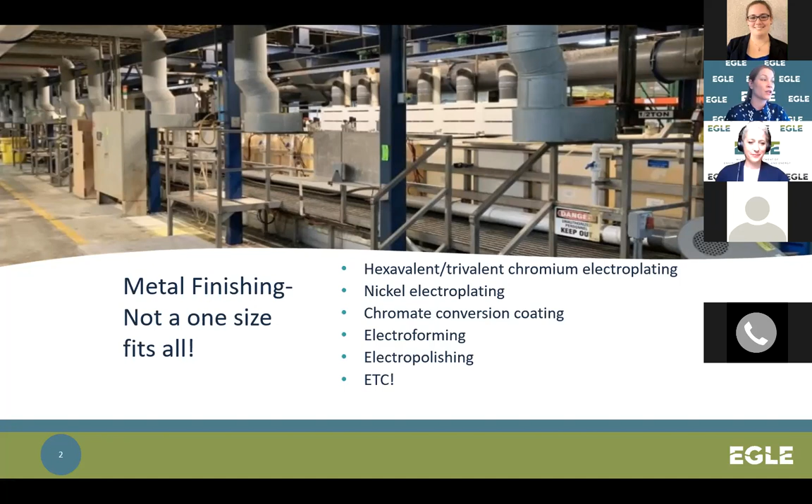So those companies that are using hexavalent chromium, trivalent chromium, are going to be subject to the chromium NESHAP. That also applies to anodizing that's conducted with electrical current. And there's other things like chromic acid etching, which is part of the plastic parts plating process that does not use an electrical current. So it is not subject to the NESHAP currently.

So hard and decorative chrome plating, that has to do with the thickness of the chromium applied. I've always thought, okay, well, hard or decorative chrome plating, like one is a harder finish, but it really has to do with the amount of time that it stays in the plating tank and therefore the thickness of the chromium that's applied to the product.

Here in Michigan, we've taken a different approach on our air toxics regulations, and up until the 2012 NESHAP updates, we were able to not only apply our Michigan air toxics rules to a chromium plating activity or a permitting action, but also those items that are within the chromium NESHAP that would automatically apply to a subject facility. And so oftentimes in Michigan, we would double dip, so to speak, and where a company might choose the fume suppressant or the wetting agent type of compliance approach for the NESHAP, Michigan would also require a scrubber control device on top of and in addition to that NESHAP required practice.

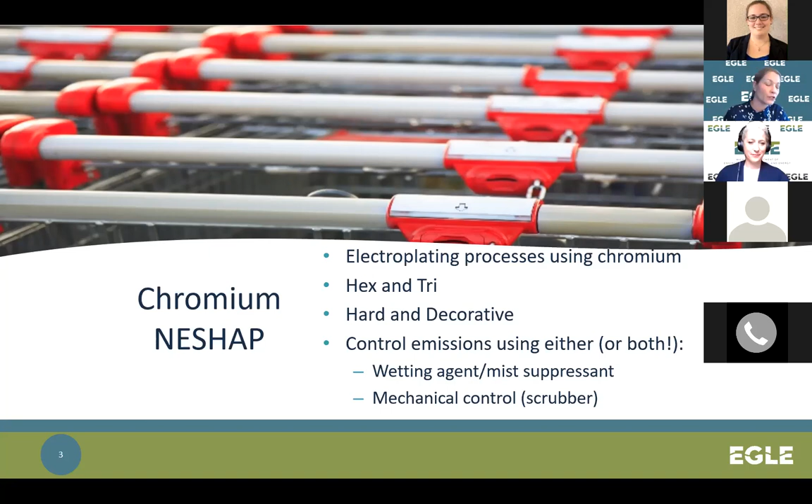So there's also the area source NESHAP for plating and polishing operations. And I will be the first to admit that because Michigan has not accepted delegation for this regulation, I know very little about it other than it exists. So if you have any questions about that, I'm not your expert, but we do try to provide outreach to smaller facilities and let them know that this is out there. In Michigan's case, since we don't have delegated authority, this specific regulation would require an EPA inspection in order for compliance assessment to occur.

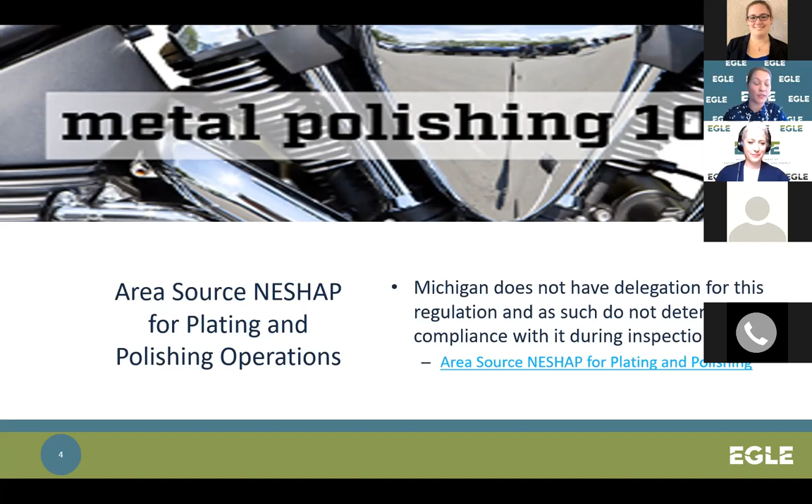And last year, we did update our metal finishing industry guidance. Our website used to just be specific to chromium electroplating, but we really recognized that we were missing out on quite a large portion of the metal finishing industry by just really streamlining to the chromium regulations. And so we added some components to our guidance, and Jennifer and I worked real close together on this one and developing some guidance materials for small businesses that have a plating or polishing industry.

Things that are vented internally versus externally. Some plating operations are vented internally. And really, we've come across a few companies that have decided to change ventilation from maybe once when it was internally vented to, you know, now they're really getting into an employee health approach where they've realized that we really need to vent some of these plating emissions externally. And so how does that impact their permitting status in Michigan? And this is one of the ways where they can look that up.

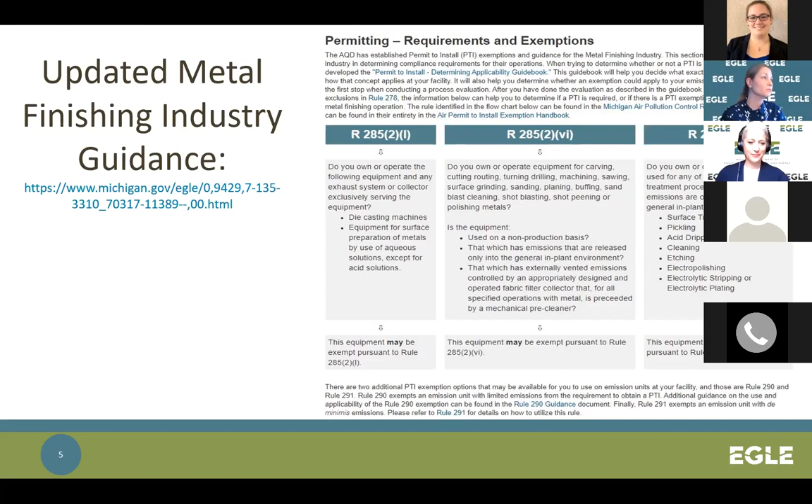So now we get to the fun part, and I'll let you know throughout the slides which photo I didn't take, and I think there's a couple, but we'll go through that. But for the most part, these pictures that you'll see are photos that I took myself on inspections at different types of platers. And when I do inspections at these companies, I often see a significant amount of turnover. So almost every time when I'm going, I'm really doing kind of an updated training exercise for the person that's in charge of the maintenance operations and the control equipment and ventilation system.

And so I really do a focus on what should they be doing in their day-to-day, month-to-month, or quarterly O&M inspections, and what things should they be identifying that they can identify, correct, and fix before an inspector gets there and really implement that as part of their preventative maintenance program.

I always say, look and listen, okay? These are some of the biggest cues to detecting problems, especially with some of those aged control devices, because it becomes pretty obvious to an experienced ear that if something isn't right, it probably won't sound quite right either. Air leaks are going to make a noise, and if it sounds different, there's a reason for it. Liquid leaks are also a problem. So can you see any leaks or liquids that are accumulating around seals or drain pipes?

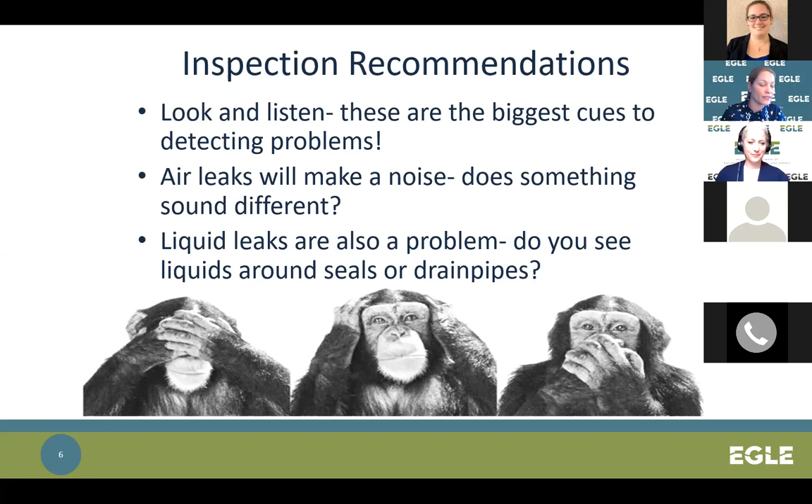And the problem when you have air leaks in a control device is that it creates air infiltration up top, usually on the roof. And so that's going to directly affect performance below, and you're not going to get as good of a capture and therefore protection of your employees. But it can also impact the performance of the control device itself. So let's get into some good stuff here.

So we'll start with this hexavalent chrome plating scrubber. We started investigating this company while we'd been there in the past. It had been a few years since we'd been there. And we got a tip from a surveyor that identified an unusual discharge into a nearby creek. And it was identified as chrome plating waste liquids that were being discharged.

And in the case of this source and also others, it was an aged facility that was using concrete conveyances in the floor to transport their waste plating materials into their on-site waste pre-treatment system. And there was a breach in the concrete because of the corrosive nature and time that led to what turned out to be identified as a very significant and ongoing leak into not only the groundwater, but also surface water of the state.

So that doesn't really have anything to do with air quality, but we talk between divisions, between air and water and waste. And through those discussions, I realized it had been some time since we'd been there, and it was time for an air inspection.

As you can see, I want to say it was probably January or February up here in Michigan at the time of the inspection. And this is one of your more obvious cases of, oh my goodness, there's a significant problem here. You can see that there's large icicles that have collected because the scrubber water was leaking out of the scrubber. This also has got a brown hue and discoloration to it because it was dirty and contaminated with chromic acid from the plating solution.

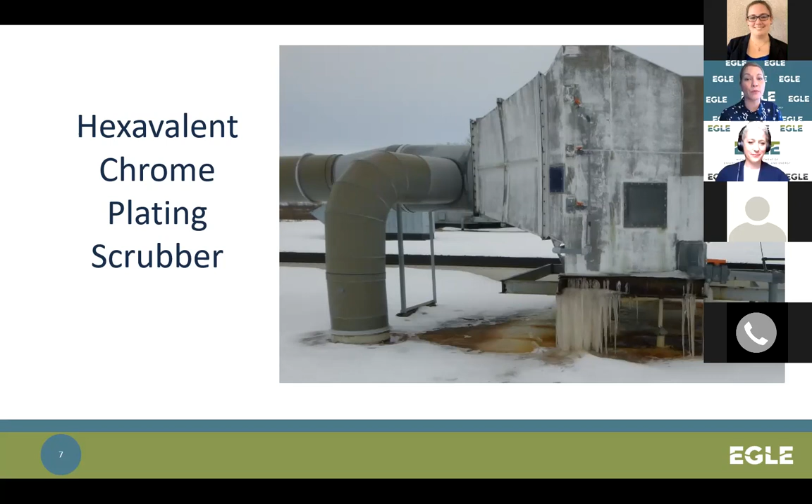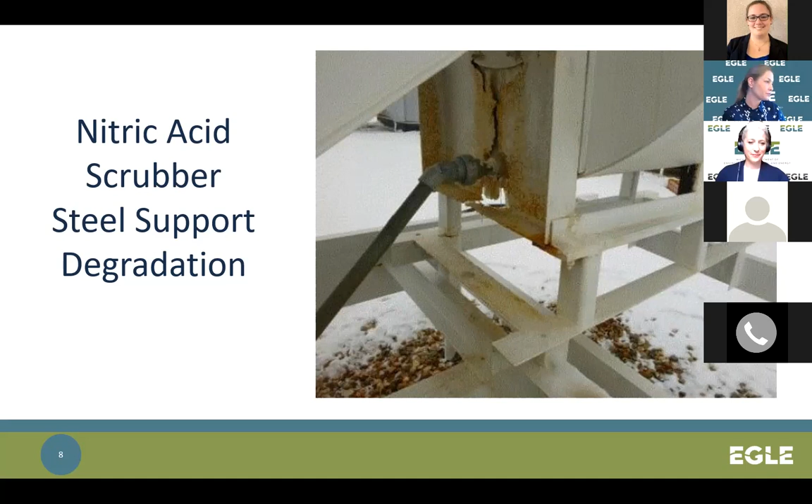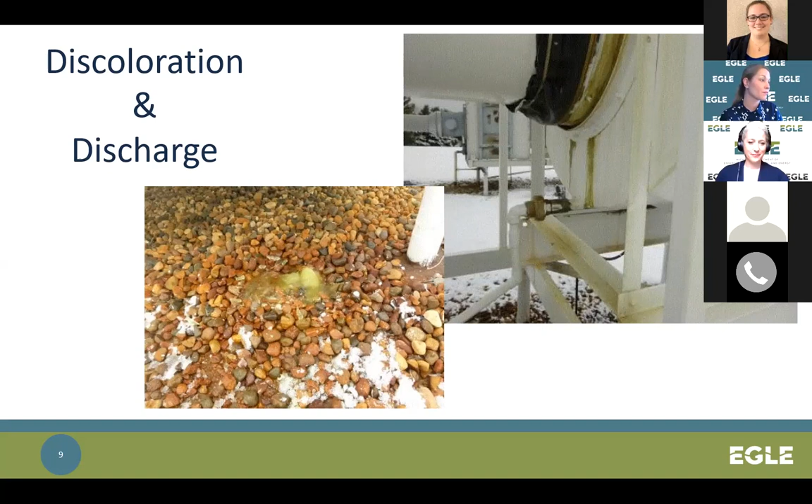Here's some visual cues. It's another one that's obvious, but you could see that over time, we don't expect there to be zero emissions from a scrubber, right? I mean, we still have an allowance of emissions that can occur from even a control device. And so I would think that if there had been an accumulation of, say, 20 years over time, it wouldn't be entirely unusual if maybe there was an upset at some point to see what we see on this scrubber, which is a chrome scrubber, copper scrubber again. And on the right-hand side, you can see all of that green staining on the stack.

Well, it just so happened that they had painted that entire unit 3 months prior to me arriving. And I'd been there about 3 months earlier, and I still had some questions about really what was going on with this unit. And so you could see I went back and saw that there had been a significant amount of green staining down the stack, indicating an ongoing droplet reentrainment type situation with this packed bed scrubber.

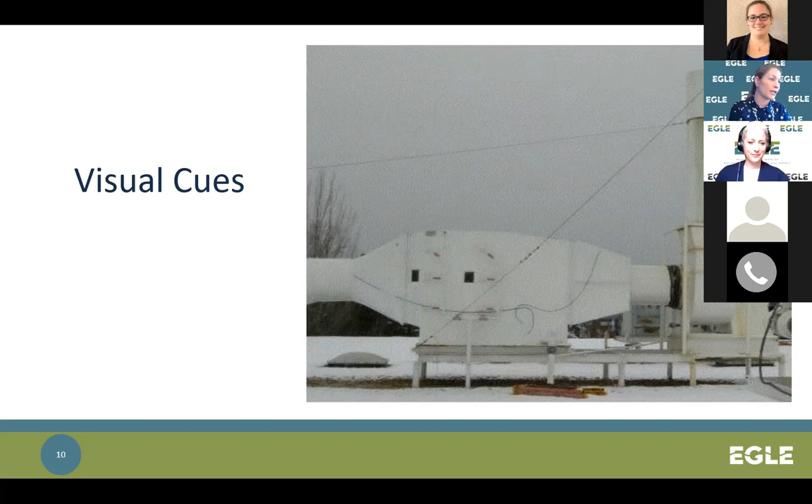So here's a not so obvious visual cue of a control device that's either had an upset at some point or some sort of emissions event that's remained unexplained in this particular facility. I happened to be walking around on the roof for a stack test for another piece of equipment, which was a chrome scrubber. And I realized around this copper scrubber, the rocks just looked a little bit different. And I was trying to figure it out when I was walking.

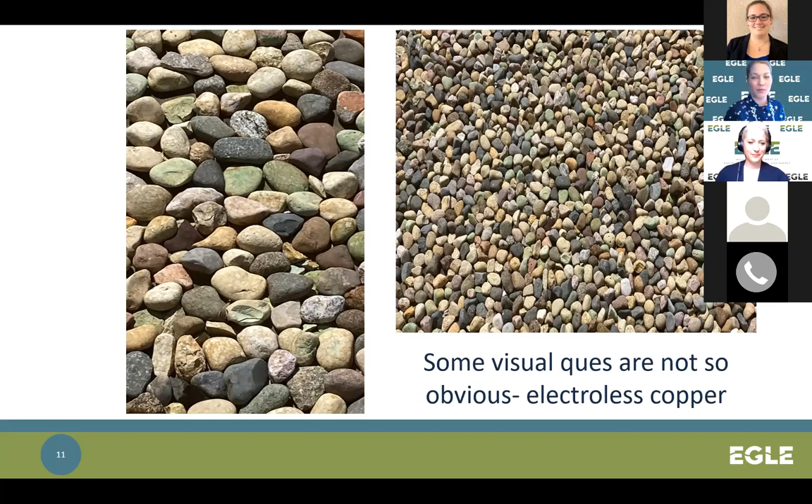So when you're walking around, I find myself, I'm always looking up, and of course I'm trying to be careful, but take a moment to look down as well, because as with this, you're really not ever sure what you might come across. And I really was just working from a hunch on that one, but it turned out to be something worthwhile and something that I'm going to monitor going forward to make sure that we don't have an additional accumulation of green rocks on the roof here. What I'd hoped I'd see when I go back there next time is either a removal or a replacement of some of that stuff, but that'd be probably expecting just a little bit too much.

Here's another example of something that went overlooked by a very experienced company that has a very, very rigorous O&M plan, but they also have a high turnover to where they really just hadn't been training their employees properly. And those that were doing the inspections of the unit didn't know what to look for. And this is one of those cases where I provide my experience to the company and I guess do maybe a little mini training for some of their staff in the moment of, these are the things that I'm going to look for. And these are the things that you should be looking for when you're doing your inspections.

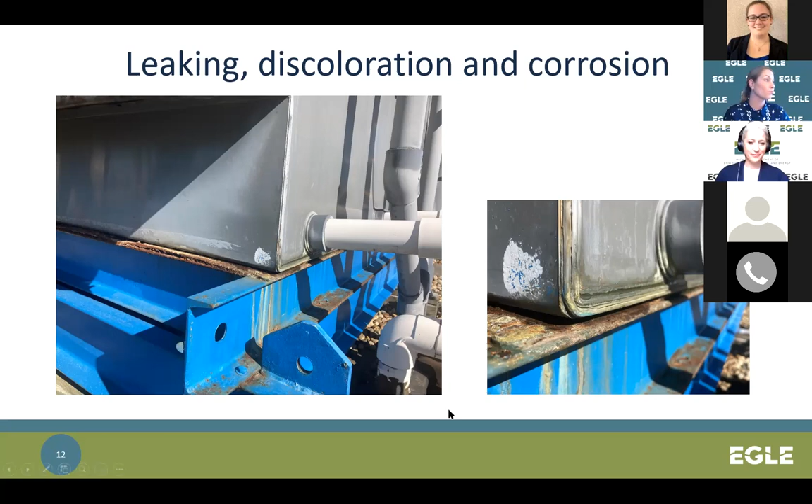It doesn't take a long time for some of that stuff to happen, especially when you're letting the concentrations and the metals and the nitric build up in your waste stream. Not even a scrubber can scrub out all of those contaminants. So they really were dealing with a couple of different issues with this unit, and hopefully, I haven't heard anything from my complainant, and the company has implemented a more frequent procedure so that they're paying a little bit more to get their waste removed from the facility before any of the concentrations get to the level where this type of chemical reaction can occur. So please don't underestimate the dangers of the plating activities.

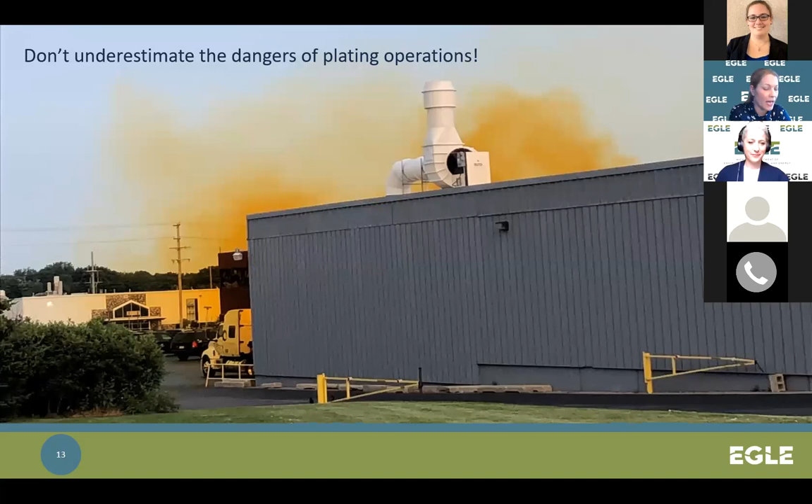And I see a question from Jeremy here. So what percentage roughly were these facilities examples, small businesses versus larger, maybe Title V sources? And let's see, so the one we're looking at right now is, trying to think, a Title V source. This is a combination two plant facility where they do plating at both. Let's see, so this photograph here, this is an area source. So there's a few different plating operations here, but this is not a major source. And the first pictures that I showed you of the icicles and the significant acid degradation, that was also an area source facility. So we've got a combination of both here, but that's a good question.

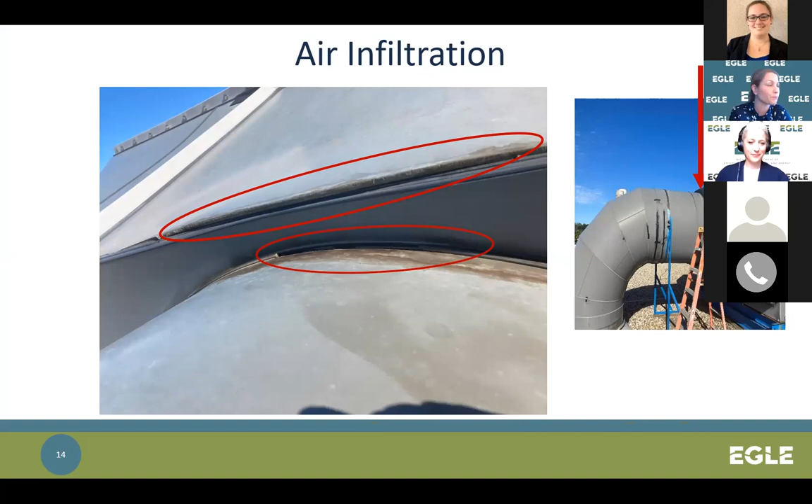So this is an example of the duct tape that was required to implement some temporary repairs on the unit that we were just observing. They tried a more permanent solution, which I've seen pretty frequently on these ductwork repairs, where they take like a plastic and a hot melt pen and try to seal up these seams with their hot melt. Unfortunately, in this case, it required a full shutdown of the line to properly repair it, but they wanted to get their testing done. So they implemented the temporary repairs of some duct tape type material to get that airtight.

And the concern with this was because the leaks and the air infiltration were occurring on the inlet side of the scrubber. And so when you've got basically dilution air and some changes to the airflow of the unit, you're really not getting very accurate testing results. And that was why the first run was invalidated and the company was required to start over at that point. That's probably the second time for that particular facility. I want to say they have 6 different chrome plating facilities, all owned by the same company in our area that I regulate. And I've had to do that previously. And you'll see an example of why there was an issue at one of their other facilities in a picture coming up.

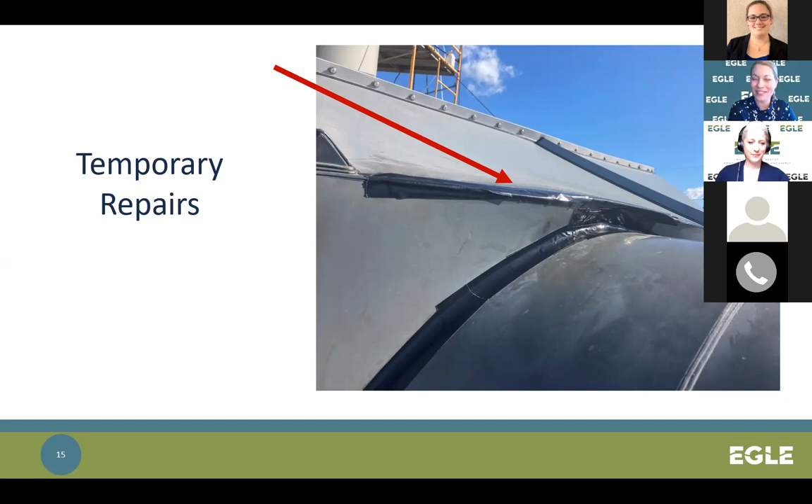This was the scrubber also located there that was going to be tested the following day. And this was a chromic acid anodizing wet scrubber. And this is the scrubber housing on the inlet side of the unit as well. And you can see if you look toward the top of the picture that there's some sealant materials there, but as you travel down in the photo towards where the arrow is pointing, you can see that that sealant material is no longer present and that there's been separation of the body of the scrubber there as well.

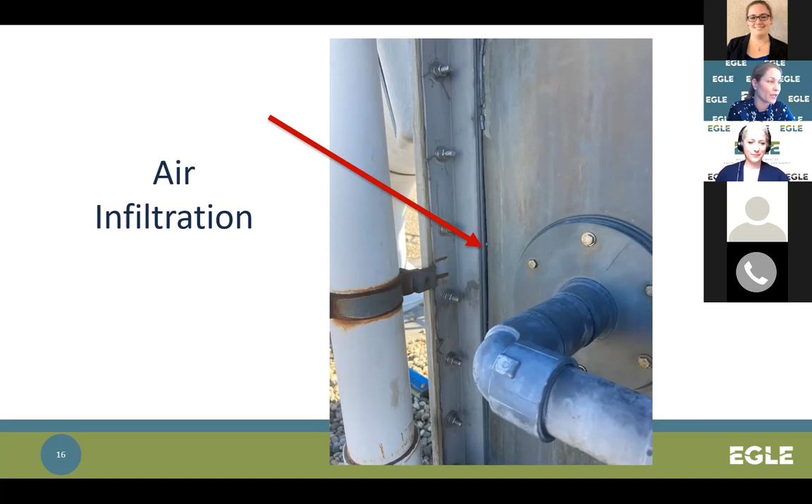And so that was another air infiltration scenario that I found basically because I could hear that air whistling as it traveled across that spot and it didn't belong there. So they were able to more easily correct that deficiency. But again, I'm going to point out that this was a scheduled stack test and they knew I was going to be here and they still missed all of this stuff. So that's why we required some additional O&M activities here.

So when we're out at inspections, we're also really looking at things from a multimedia approach. And a lot of us do that. I've worked really closely with several of our waste management folks, also with our water folks, and being that I'm currently a certified industrial stormwater operator, those types of things in water exposures are always on the forefront of my mind in addition to my air quality official duties.

So if we hadn't been there for stack testing, they probably wouldn't have known this was occurring. And it's another example of they did an inspection a few days before, so this must have really just happened overnight. And those kind of stories do start to get old, but you really still have to work with the companies to make sure that they know what they need to be looking for. And in this case, in the meantime, that scrubber ductwork has been fully replaced simply because it was no longer repairable due to that corrosive nature of the materials that we're working with here.

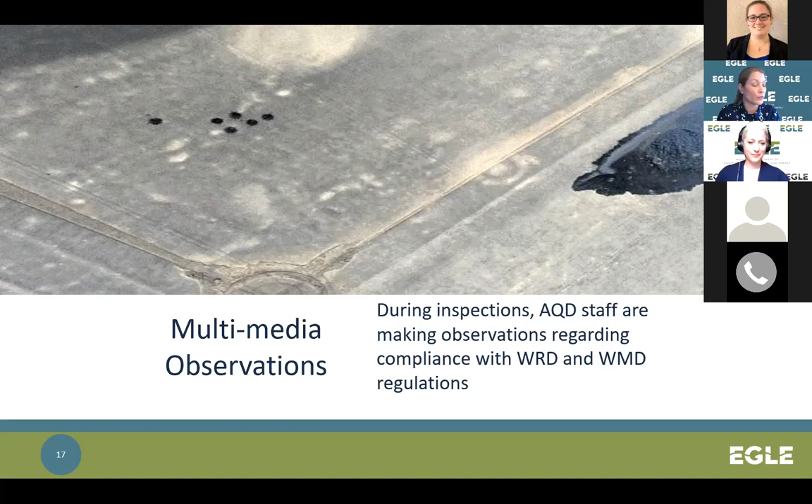And it's my understanding that this company is no longer operational, and the person that was renting the facility and operating this small plating line basically skipped out and left all of the waste there for the building owner to take care of. And of course, as the rules go, it is the responsibility of the property owner to take care of these wastes. So they're working collaboratively and creatively trying to come up with a solution and a disposal so that we can get rid of a lot of this stuff from this facility here.

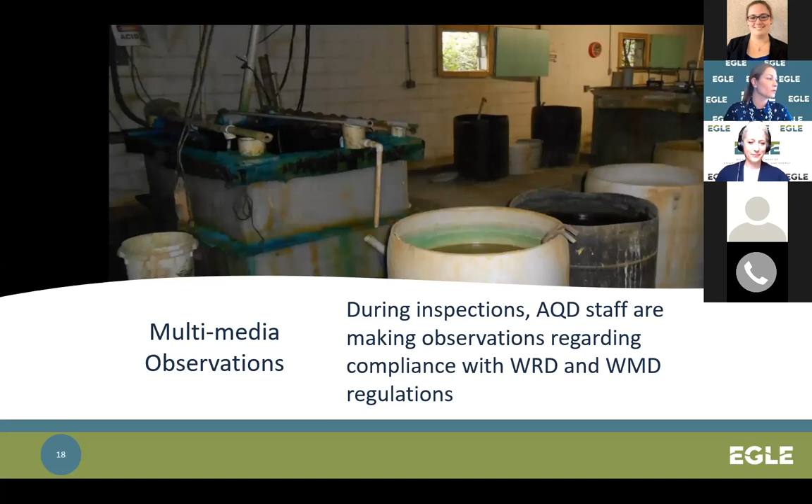All right, so that's it. And I'm happy to take additional questions and talk about really anything in the industry that you might have questions about, specific questions about different sources, or I'm open to talk about whatever you'd like to talk about.

Thank you, April. I am curious, with chrome plating, have you seen any new chrome platers enter the market? And if so, are they large businesses or are they small businesses that are doing it contractually? I'm trying to think. What I've seen is a lot of rebuilds of existing facilities. And there was a change in interpretation in the NESHAP for what is considered reconstruction that maybe has some value to discuss in consideration of your question. And really some of these platers that are from maybe the late 60s, the 70s, even the 80s or 90s, they're really starting to show some of that degradation that I've shown you in the photos.

And originally the interpretation of the chrome NESHAP was that a replacement of the plating tank itself was considered reconstruction. And so it happens fairly frequently that companies either get a new tank or they're swapping tanks in and out and send them off to get refurbished and have a new coating put on the inside, a new sealant. And it was later clarified that the reconstruction of the tank actually includes all of the ancillary equipment as well. And the definition of affected source actually defines what all is included in the affected source, so that's what you need to evaluate towards reconstruction as opposed to just a tank swap out. But I've seen several new paint plants and things like that. But from a chrome perspective, we've just seen a lot of refurbishment going on.